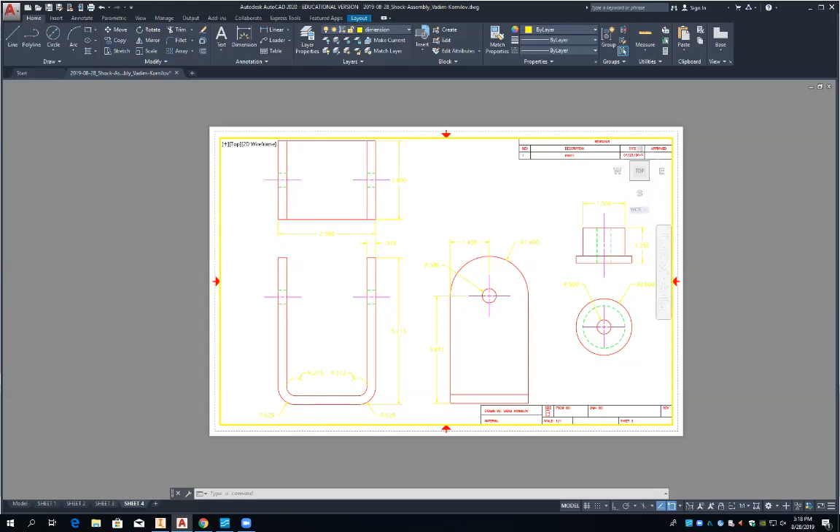Okay, here. Okay, so we're going to do a new, and this thing was right? Yeah. Okay. Okay, so does everyone want to start from scratch on this so we kind of work together on it? Yeah. Okay, so as we do this, I want to do an auxiliary drawing. We did a little section drawing with the revolve command. Did we just try to revolve, or did we do an actual drawing with it? I think we just experimented. Okay, I'd like to do an actual drawing with the revolve command after we do this today, so that you get going. Okay, now, the one thing I want everyone to remember is this.

If you want to, and I'm going to try something new starting next week, okay? And I think this will help everyone greatly. I do a drawing. I found out that in PowerPoint, you can actually record everything you do. And then I'll post that PowerPoint on Canvas for you. Okay, so that if you go home and need any extra help, you can just look at that, and I'll start and stop. You know, I don't want you to have to look at something for 2 hours when it only takes about 20 minutes to draw the drawing. Does that make sense? And so, those of you who are in the last class, doing the assembly that we did even here, we can record that whole thing. Like Windows 10 also has a screen recorder program.

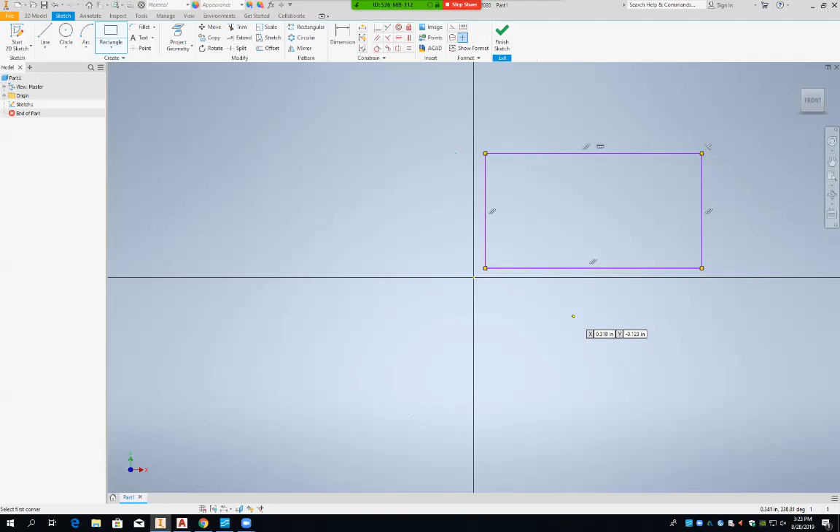In fact, I'm going to do this one slightly different. Hope it works, I don't know if it'll work. I've never done it this way, so we're going to try it a little different. How's that? Good enough? You're the boss. Okay, let's draw our rectangle this way around our origin. How's that? Okay. So we're just going to try a different way.

I just want you to see how things react, because as you do different types of drawing, you might see one that this might apply to a little bit better. And I'm doing this to hopefully introduce a new command later on as we start doing those two little brackets there. Okay, now question for you.

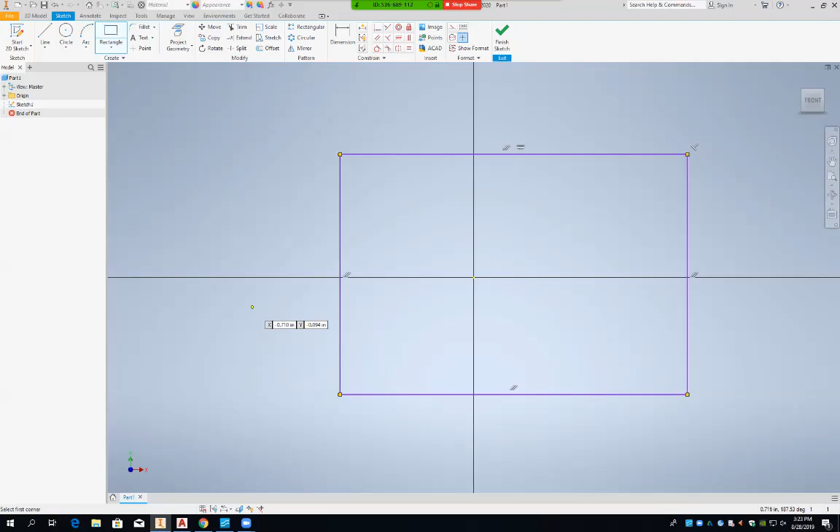If you go ahead now and do this, a lot of times what I'll do first of all is stick a dimension right there and just accept it. Just whatever it is? Just whatever it is. The reason why is a lot of times if you don't do that and go from the center to the end, it might shove that whole rectangle out of all the coordinates into one coordinate. Does that make sense? So basically later you'll revisit that. We'll revisit this dimension in just a few minutes. Does that make sense why I'm doing that?

A lot of times when you start modeling something, you do a nice little sketch of the part, you add one dimension, and it inverts the whole drawing. So just have a placeholder and then add some others and go back and edit it. That's all you have to do. Okay, so now this is 5 inches, right?

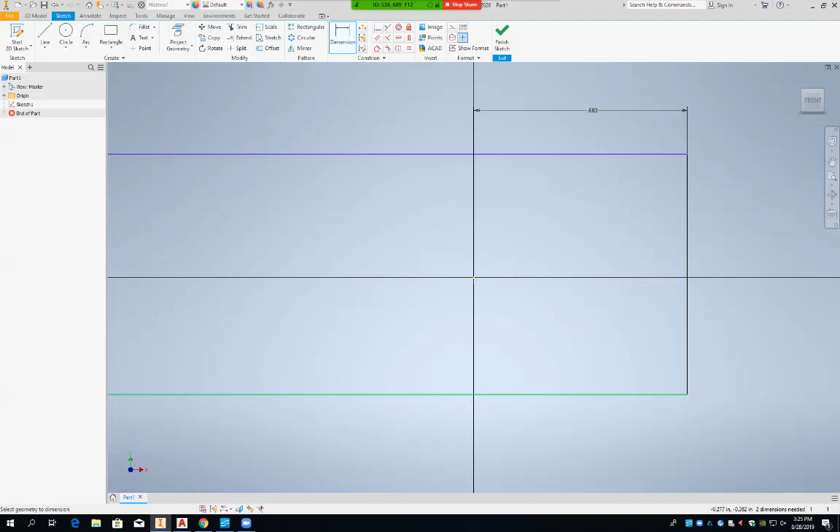So now what I'm going to do is go from the center here out to here and just make this 5 divided by 2. Yeah, it's a tough measurement to get, isn't it? Okay, now this one is constrained, so I can actually delete that one right there and then add another dimension here of 5. Does that make sense? So I added a placeholder in there to keep it from moving all over the place, and then added that in 5.

Now, this probably would have worked just fine, but I'm just trying to show you some things that might help you in the future. It's refusing. Oh, no, we deleted it. Okay, mine looks different. Okay, so now, this is that. Good, now let's go ahead and add a dimension here and make that 5. Okay, so there, now.

Now, could we escape for me? Now, let's delete this, oh, I'm sorry. This is 5 divided by 2. Oh, okay, I thought that. That's okay. 5 inches divided by 2. There you go. And then now, 5 divided by 2. Okay, so we better undo this here. If you can get your computer here, you want to put that there. Okay? Does that make sense? That's why it looks different.

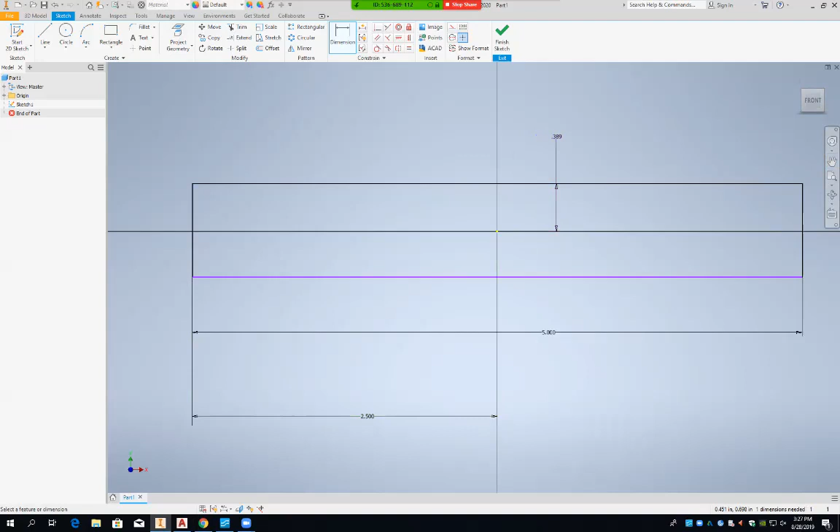And then we're going to add a dimension from here to here to keep it, and then from here to here, it's going to be the height divided by 2. And then we're going to delete that. Okay. Now the height of this is 3, right? So all we're going to do now is add a dimension from our center point here up to the height here. Again, it's just a placeholder. And then from here down to here, it's going to be 3 divided by 2.

Now, if you just want to type in 1.5, you can, 2.5. I just want you to get used to the calculator. That's all I want to do. Okay? Now, I'm just going to delete this here now, and then let's dimension this whole side here as 3. See, I'm completely symmetrical around my origin.

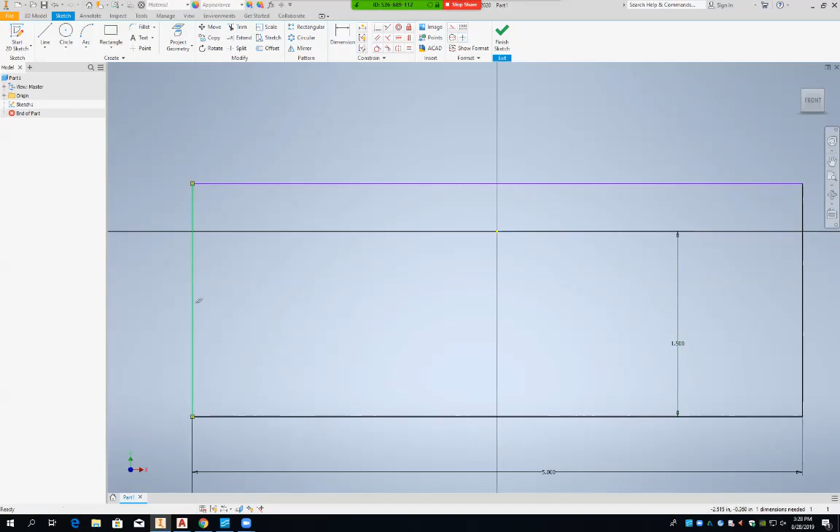Oh, I see. You get what I'm trying to do here now? Yes. Okay. So, I want to show you another way of using the axes that are automatically built in with our origin, with those planes that we started with. Okay. So let's go ahead and finish our sketch. Does everyone have this okay?

Anyone not have it? The delete. So okay, I get confused when you said, sorry. I'll wait. So, you can delete this one here. Delete him, and add a dimension now, and you can go from here to there. Because it's only the half. And then we'll do the same thing going up and down, side. Okay, that makes sense? Can we do it also up and down? So, we have options here.

Well, it's like we're using two pieces of information. We're saying the whole thing is 3. So why did you do it like that, with the origin together? It's half of it. So by calculation, this is a half as well. But it's just that we approach it by saying, this is 3, this is half of that. There's numerous ways to do things, and this is just one way to do it, one way to think about things.

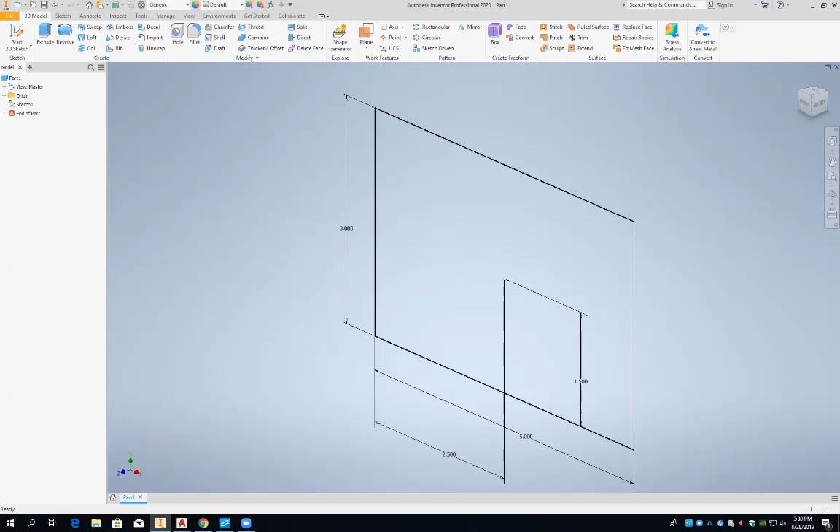Why they even put it there? But yeah, the asanas that you do is one of the aspects of yoga. Okay, so now, other ones. You've heard of Kundalini, right? You never heard of Kundalini? Okay, that's how you reach enlightenment. But you need a teacher. You raise the energies, the chakras, to the top chakra, and once you reach the top chakra, that's it. You get nirvana. And I say that once you reach nirvana, you die. Because you connect to the source, you experience such happiness and joy that you don't need food, you don't need anything. You're done.

Right? Okay, so let's finish our sketch. Now, you realize that when you do this, remember you still had blue lines up here until you had it constrained to the origin. So it could still be moved around, right? The box would just be moved around, but now we've locked it down to the origin. And everything turned black and constrained on you.

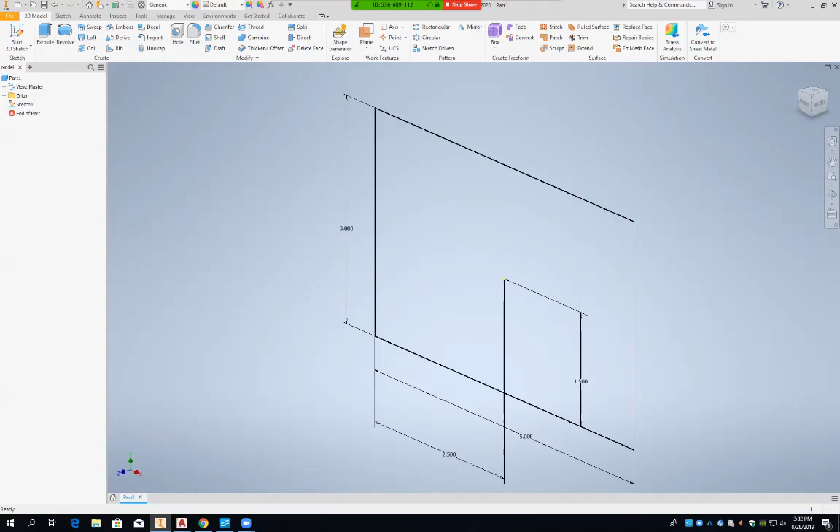Okay, so let's go to our extrude. And so what we're going to do is the third one, symmetry. Okay? And then what we're going to do now is, what's the depth of this? 2.12, right?

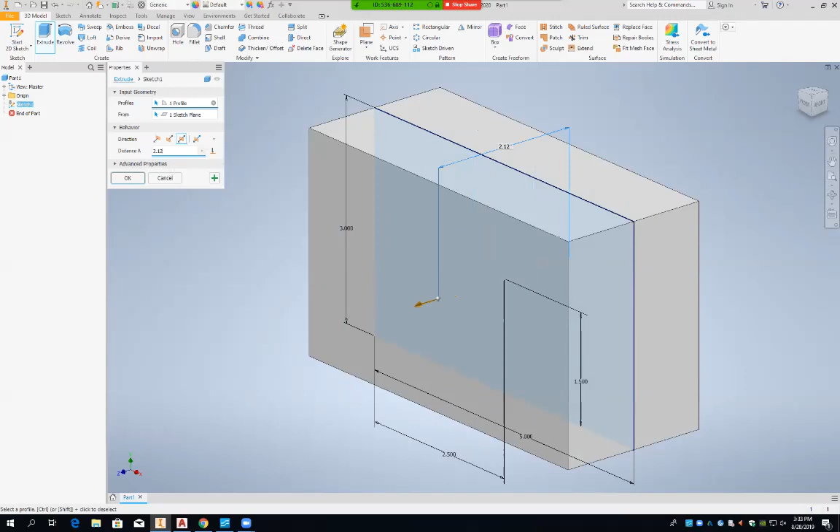Okay, you see how it's kind of built symmetrical about me right there? And then hit OK. So you need to divide it by 2? No, because hitting symmetric, it divides it by 2 going both ways. It does automatically if you hit symmetrical. Now, if you hit the fourth one, it's asymmetrical. And so you can have maybe like 1/4 and 3/4 out here. Okay, does that make sense?

Okay. And then hit OK. So we have our chunk of metal right there. Okay? It's a little different way. I just want to give you this, because every part might be just a little bit different as you start actually physically designing it. Now, like the location of the origin in the part that we designed, that probably affects when you do an assembly? You bet it does. When you insert the part, it will place itself in such a way that's good. That's what the origin affects. There's definite advantages of it that you can tweak and use down the road.

Now, some simple assemblies, probably not too bad, but when you get into some complex assembly, so like, one of the opportunities I had was, me and a couple other guys, we modeled up an F-16 on the computer. Wow. And so here you have to think about where all these points come into play and where's the common reference point and everything else. And so you get into some big projects like that, then you really start thinking about how to do it. But what I want to show you right now is this.

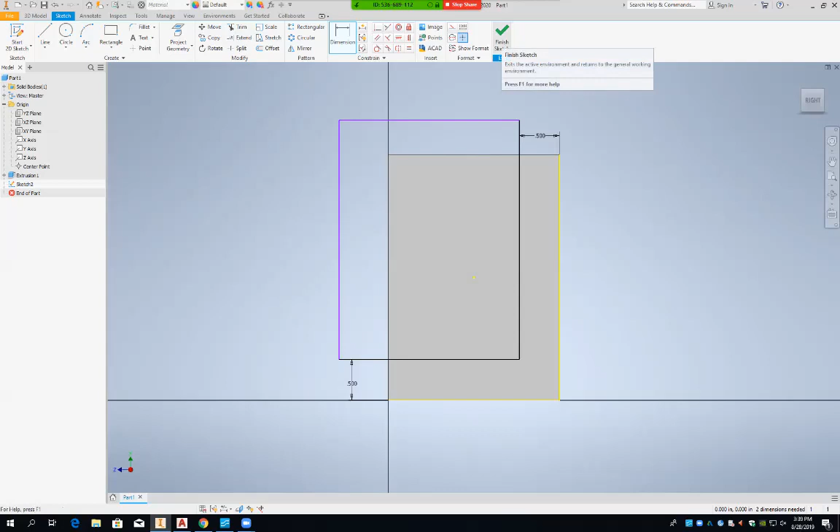Okay. So from here now, let's finish your sketch right here. Let's go to extrude, and we're going to cut now right here. So hit cut, and then for distance, you want to hit all the way. Yeah.

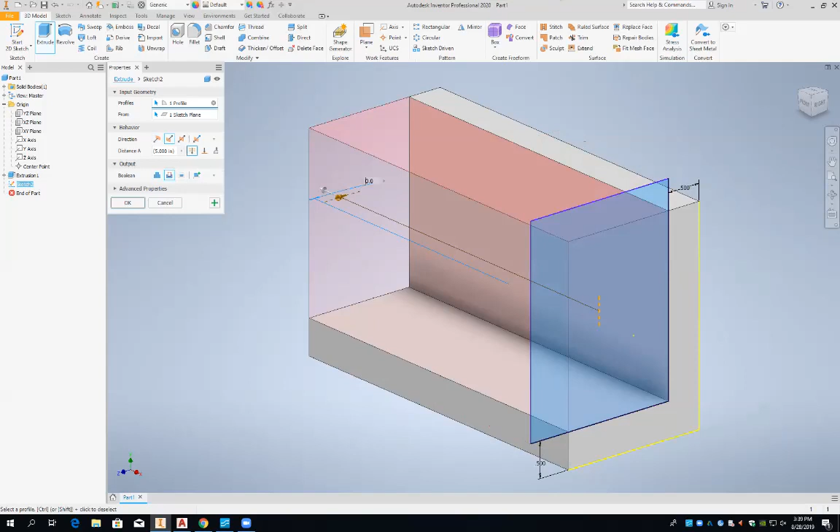Yeah. That one. Through all. That's what I wanted. Yeah. Through all right there. Okay. So again, by working with the center, it acts a little bit different where it goes one way versus the other way through all. Okay?

Okay, now, these chamfers, let's put these two chamfers on here, and then these two chamfers here. What I want to do is to do one and then mirror it to the other side, so you only have to draw one and then mirror it. Okay? That makes sense? And the only reason we got it in the center is I wanted to use the default plane to mirror it about that plane. That's why we did it this way.

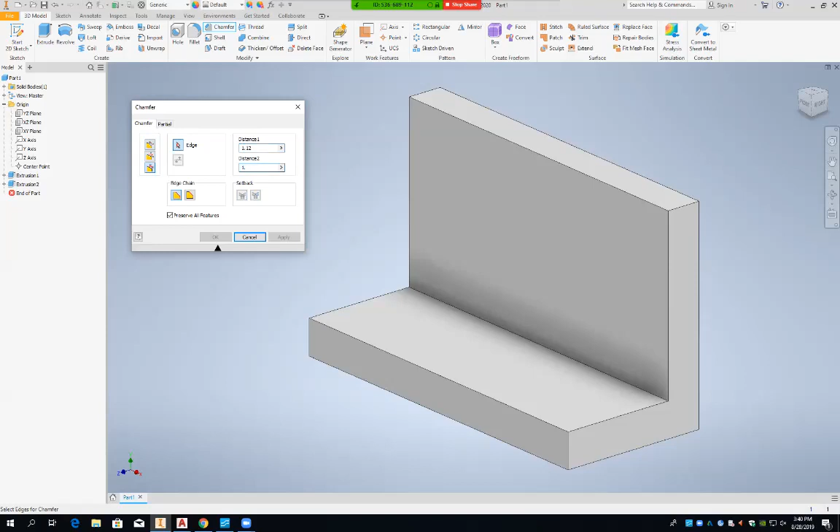Okay, so now, what is the size of my chamfer on this? 1.12, right? So we know it's a 45, but we're going to go with two distances, right? And then since they're the same, just type in 1.12. And then it's asking me for an edge. So it's this edge right there, and that edge right there, and you've got your chamfer up there.

As long as they're equal, you just have to do the distance. You don't have to worry about hitting a face. It's asking for an edge to do that chamfer there. And it did both? Yeah, because they're both the same.

Okay, but there's something else that I missed. I only see one. Right, so now hit okay. Oh, but your other one. So go back to chamfer. It's that line right there. Oh, I thought they went multiple. Got it. Okay, thank you. I thought you did a little tip there that did both at the same time.

Okay, now the other one is two distances, right? What's my second distance on that one? I think we talked about this a little bit on Monday. So let's go back to chamfer. Now, two different distances. So I'm going to go with two distances right here. Distance 1. Now this depends on which face you pick. The face you pick depends upon the first one you enter in for the distance. So we do it opposite of what we did on Monday.

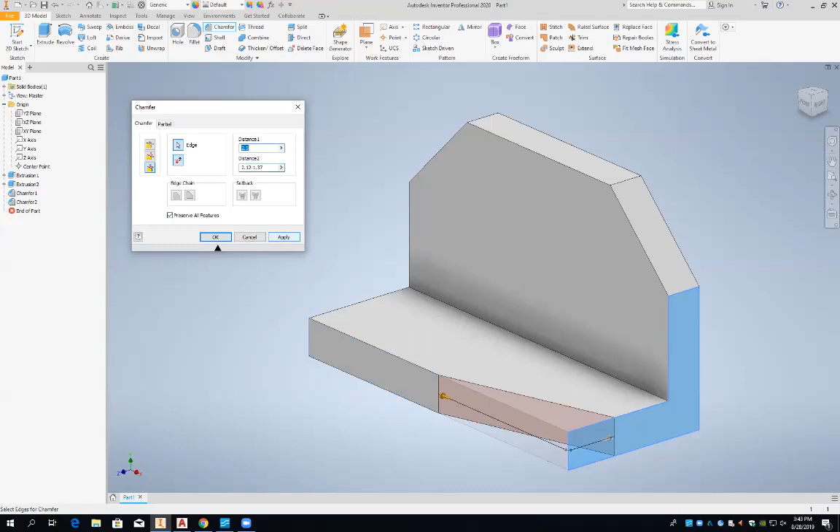Yeah, I had a problem with that one too. I got to click on the switch. We can switch it that way. What did you do? Hit the switch button right here. My switch is gray. You first select the edge, and then the switch turns on. Yeah. Okay?

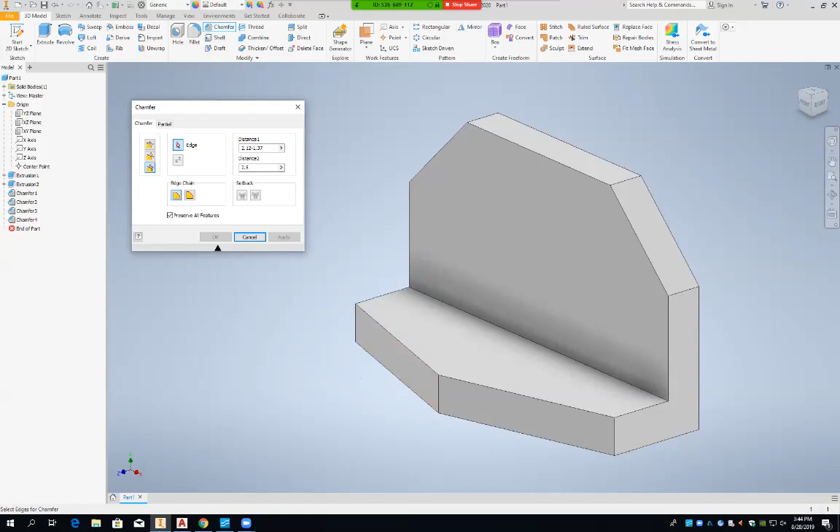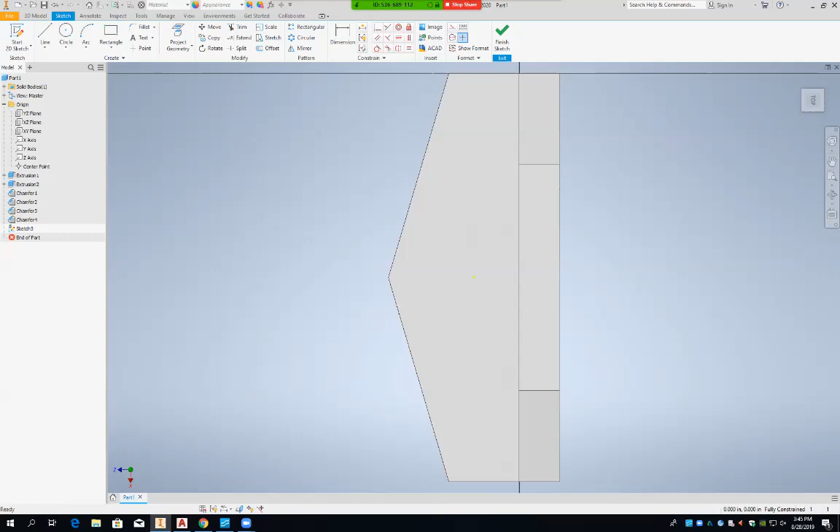Okay, so let's do a chamfer on the other side too. Okay, now we got to add that little web in. First of all, that is flush with this first edge right here. So if I start a 2D sketch on this surface here, I want to go up with it, right to there. And since I don't like that orientation, I'm going to flip it around. That makes sense how I just manipulate it around so it's what I wanted to see.

Now I want to have access to this line and this line right here in my sketch, because let's say I drew a line right here, and then I dimension that line from here to here, and that should be 0.5, right? So I have to trim this off right at that given point, and this one needs to be trimmed off at this point right here, correct? Yeah, I just dimension the point to the edge, because it comes right to the edge. It's an alternative.

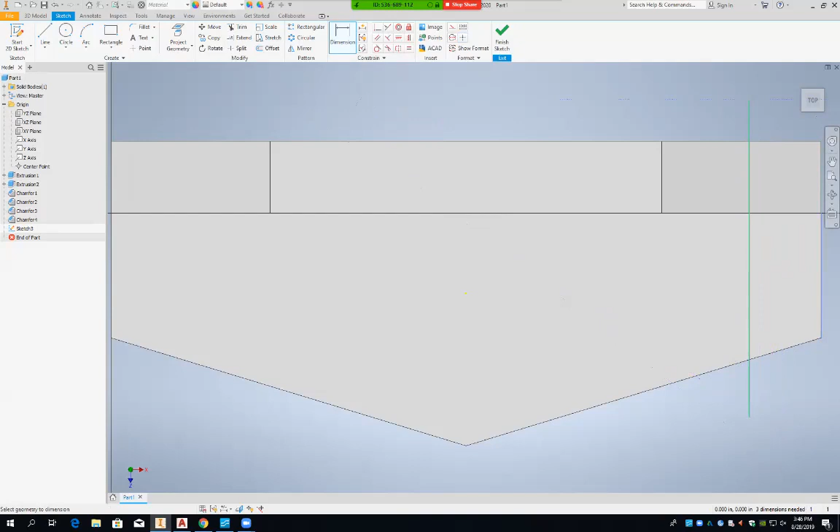Okay. So right now, if I go to trim and hit that, it's gonna trim the whole line, isn't it? So let's hit undo. You see where it says project geometry? Any line you have on any view, no matter how deeply embedded, we can project geometry back onto our current sketch plane to dimension from it. Does that make sense?

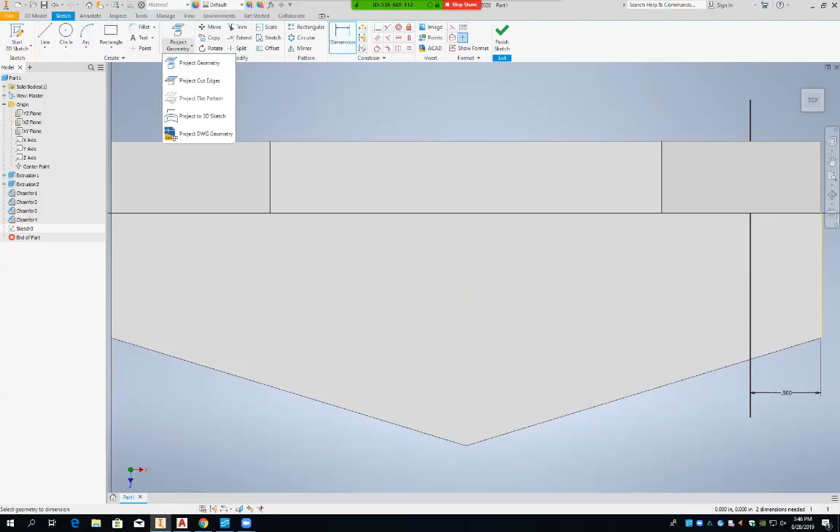So let's go ahead and hit project geometry, and project geometry again. I want to project that line right there, and let's project this line right here. Now, you see my sketch plane? I have those lines on there now, right?

So now if I go to trim, there's my line, the exact length of it right there. Are you with me what I just did? I just projected those two other lines onto my plane so I could use them to trim and get the length of that line.

Now what we could actually do is draw us a rectangle. I could go, because I have that exact point right there, don't I? And I could go to here, and then add a dimension from that point to here. What should this measurement be? Zero, because I want to bring it right up to that edge, don't I? And then I can add this, which is 0.5. There's my rectangle to extrude up.

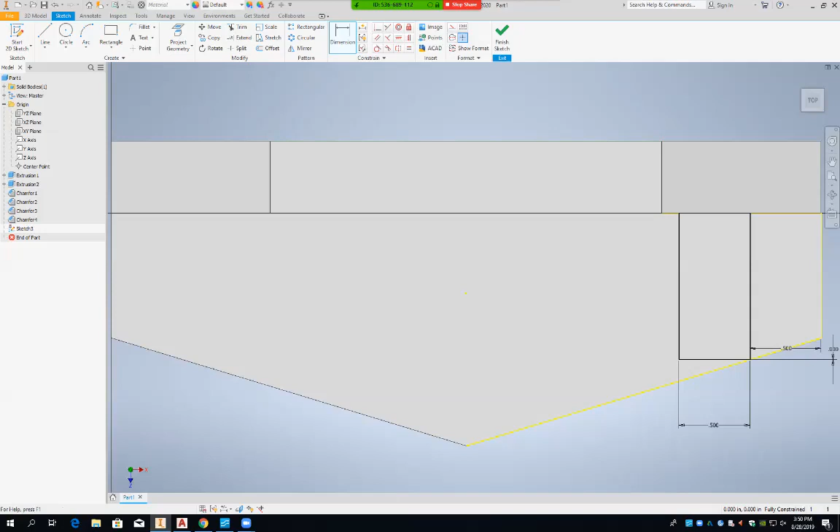We want to extrude this up here. And how far do I want to extrude it up here now? Now be careful, tell me what it is. 3 what? Minus 1.12 minus 0.5. Does that make sense? Just type them all in.

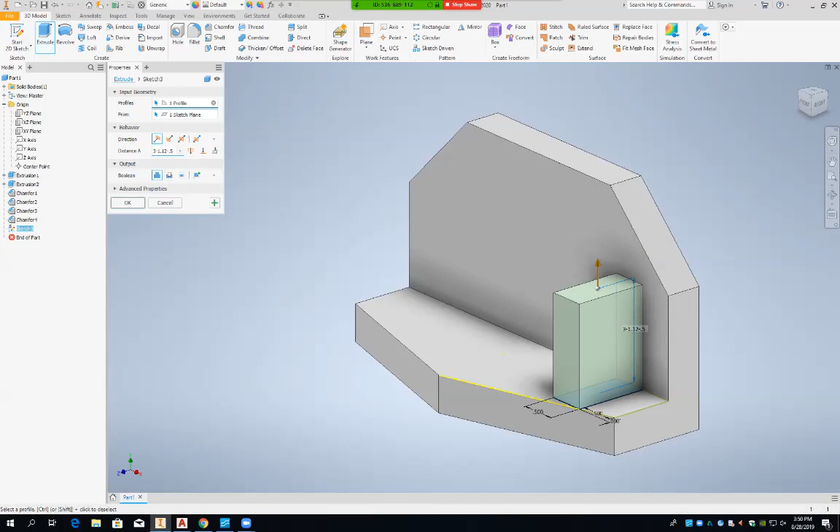Now I can put a chamfer on this, couldn't I? Because I can figure this length and this length here, right? So all we'd have to do now is come in here and go to Tools and measure. I just need to measure that line right there. What's the length of that line? 1.020, right?

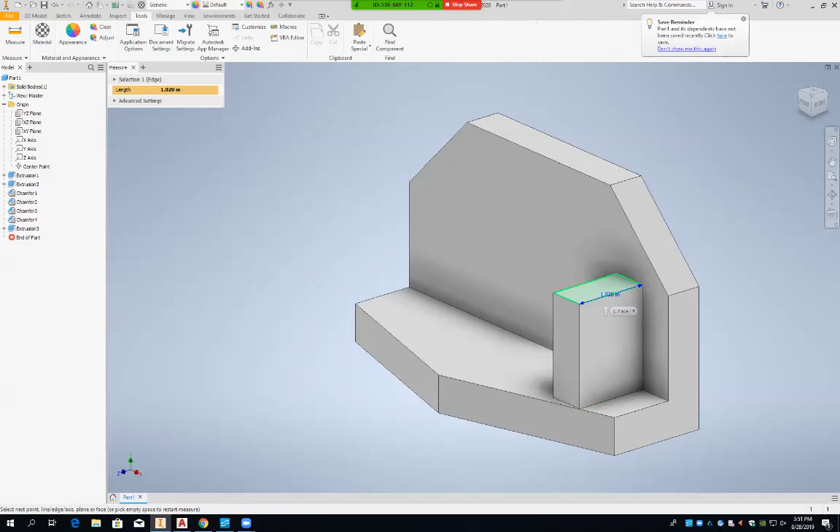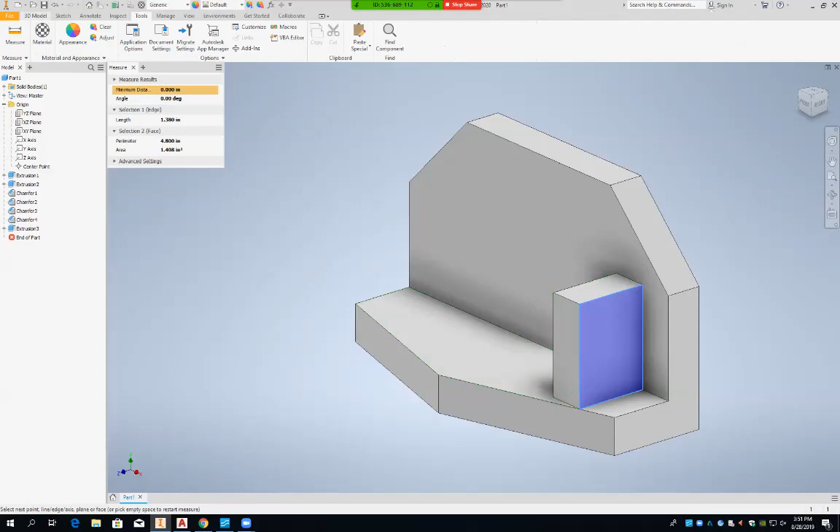So what's the length of this line here now? 1.380, right? There's my chamfer distances right there to build a chamfer on that, isn't it? Did you hit measure? What kind of... yep, so right there. Yeah, you got it.

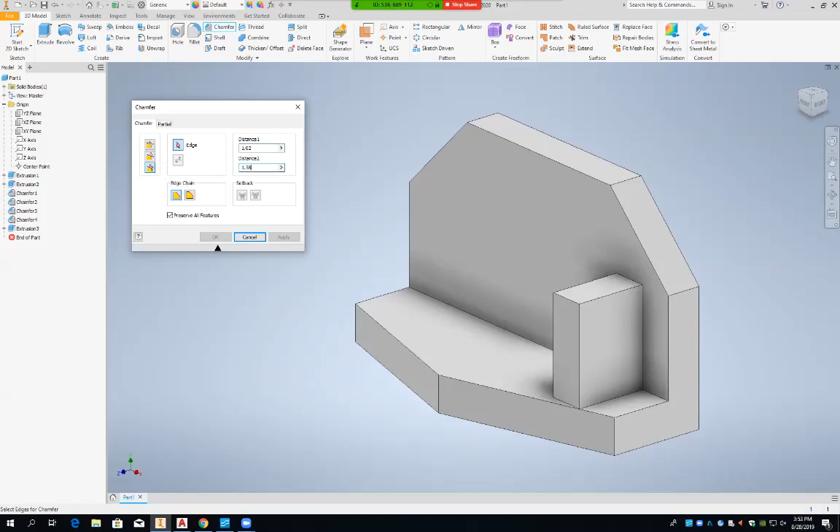Okay, so now what we can do is go back to 3D model right here. We have to go back into here in order to get access to our chamfer command. And then we have two distances here now, right? Now, I probably could have drawn a line here and picked that angle and dealt with an angle if I wanted, angle and the distance. I could have done that originally, couldn't I, if I wanted. If I would have just drawn a line from this point here over, I could have done it if I wanted to.

So our two distances now are going to be — I try to always get in the habit of putting the shortest distance up front — to 1.38.

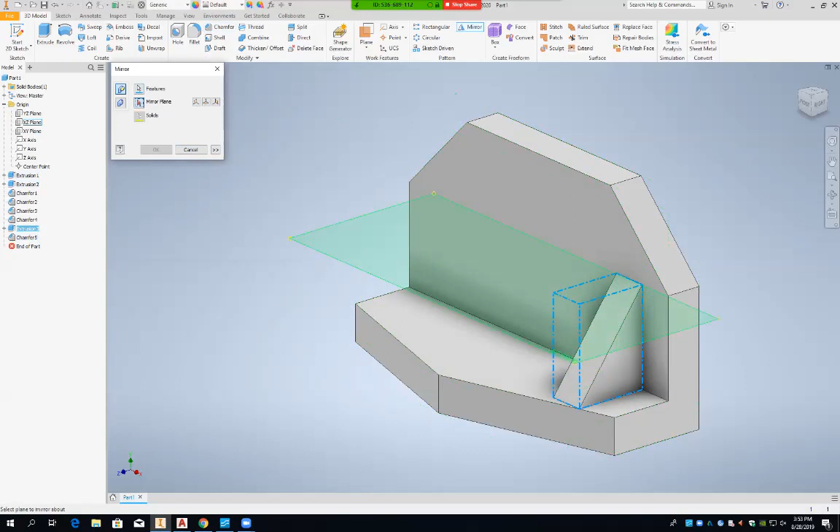And then the other distance is 1.02, right? And then all we have to do is click there. And guess what? There you go. Does that make sense?

No. Did that work for you? No, you picked the wrong line. Pick that one right there. Where you at? Yeah, I got my 1.38. And there you go. So you picked the long edge, so you were doing the chamfer this way.

Okay? Yeah, that makes sense? Okay, now look, let's go back to the edge. There you go, you got it. That makes sense? It's the edge. And then put that.

Okay, now, okay, so I'm going to click that. Mirror plane.

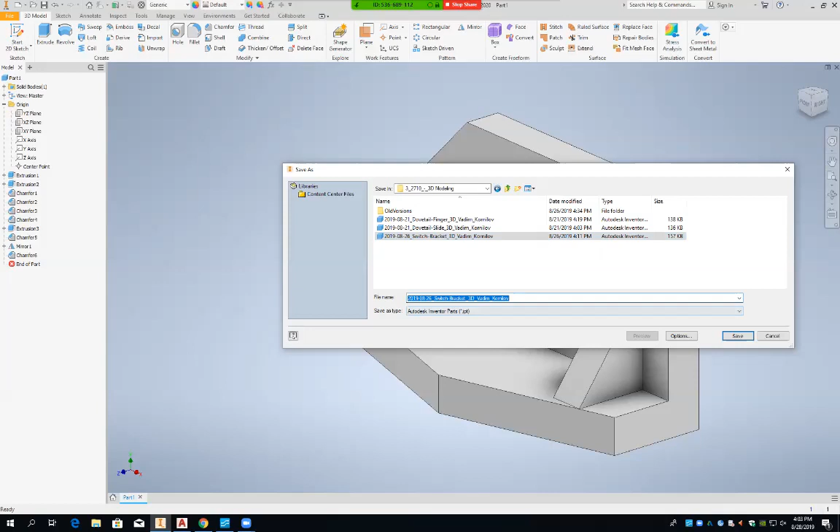Okay, so what I want to do now is - what is this called? Bookend? Okay, let's see here. That's too easy. Okay, I want to, we're going to do what's called a stuffing box. I think you guys may have already drawn a stuffing box before, maybe in AutoCAD.

Okay, so we're going to do now a revolve. Right there.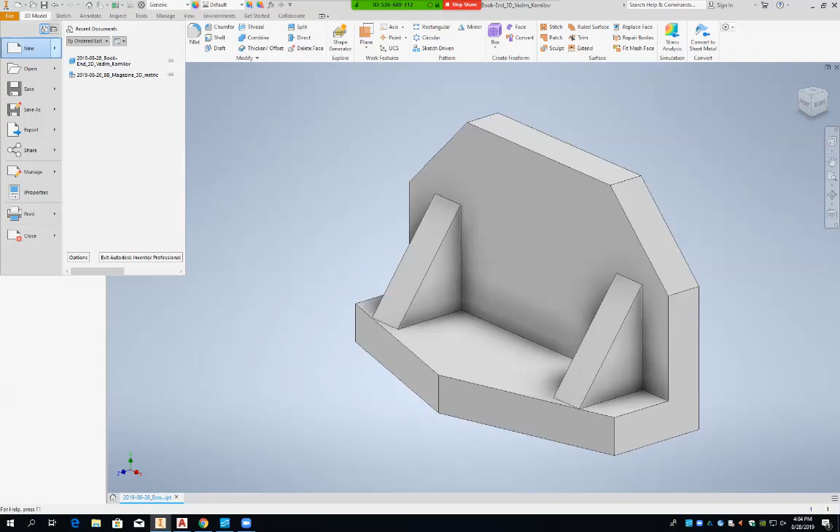Okay, so we're going to do that stuffing box. And the thing I like about this is we're going to edit the holes on that - we're going to make them counterbore holes. And we have a drill. Yeah, this is good, this teaches a lot of things. And Mike, of course, you remember that it's metric, right? Okay, it's metric, thank you.

So, file, new, metric, standard IPT, right there. Okay. Do now is to start a 2D sketch right there. I'm going to do this on the right side view, right there. Okay?

And we're going to go ahead and just do it with the line command here. We're going to come up a certain distance. Now, question for everybody - right now, if I look at that, what's the diameter of that, the outer overall diameter, the most outer one? 114 - is that 114? Okay.

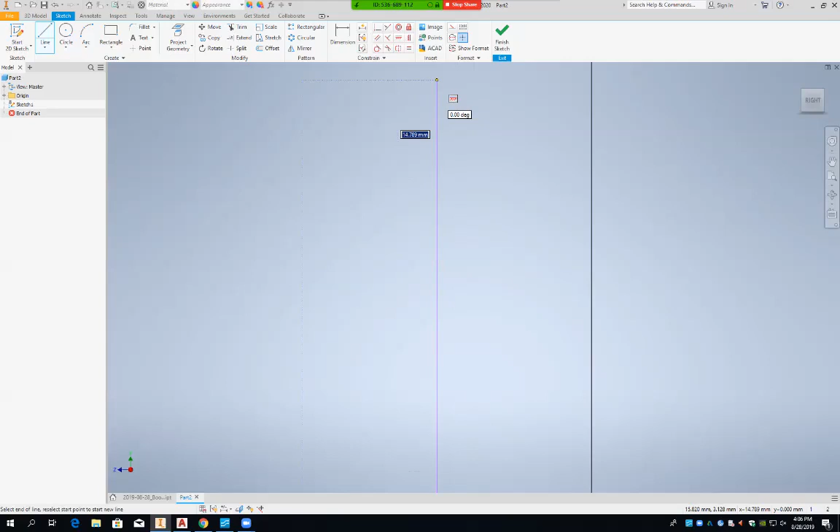And I think it'll make it so when you start to dimension your sketch, it might make it a lot easier for you. So I just want to go up so I see this maybe up about 50, so maybe somewhere in there. Does that make sense? And then I'm going to come over here a little ways.

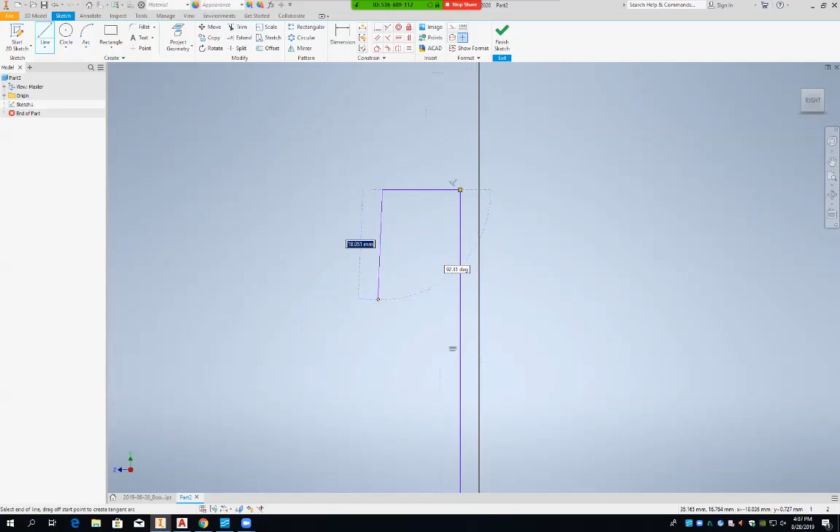I'm going to come down here a little ways, come over, come down, come over, come back up, and come over. I'm going to come down to see where I'm lined up to that bottom of that line, and come to the green dot and enter. Okay? Do you see how I did that? Yeah.

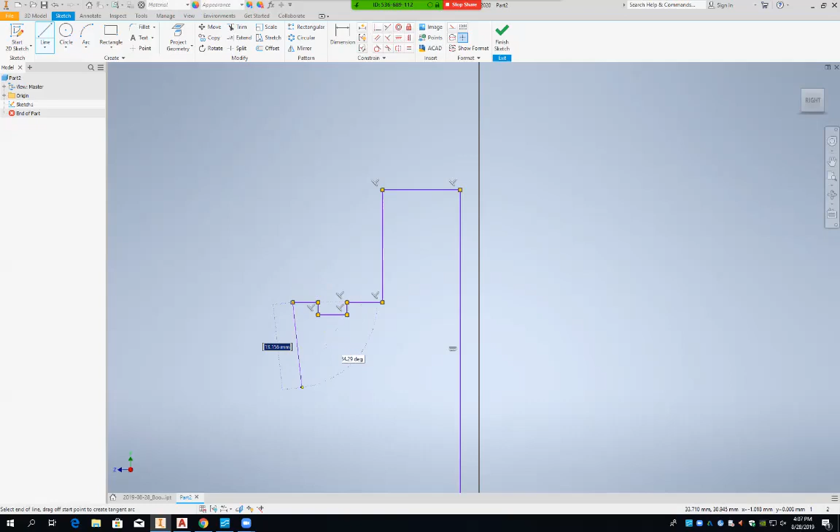So, right there, and over about there, just anywhere there - it's like an AutoDesk thing, that's okay. Now come down, roll out, parallel to everything or something like that. There you go. Is it not doing it? Go up, look, you try now.

Yeah, right there, down one little, there you go. Put that, it's over more there - sensitive than AutoCAD. See how you can tell what's lined up, these little dotted lines? And so now we know we don't have one line that isn't parallel, 90 degrees, right? Because that line right there - we can make that parallel by just doing this here, which is the parallel command, see? Right?

What I was thinking kind of, in AutoCAD - yeah, so it was if we want this, well, the F8 is ortho. Cool, okay?

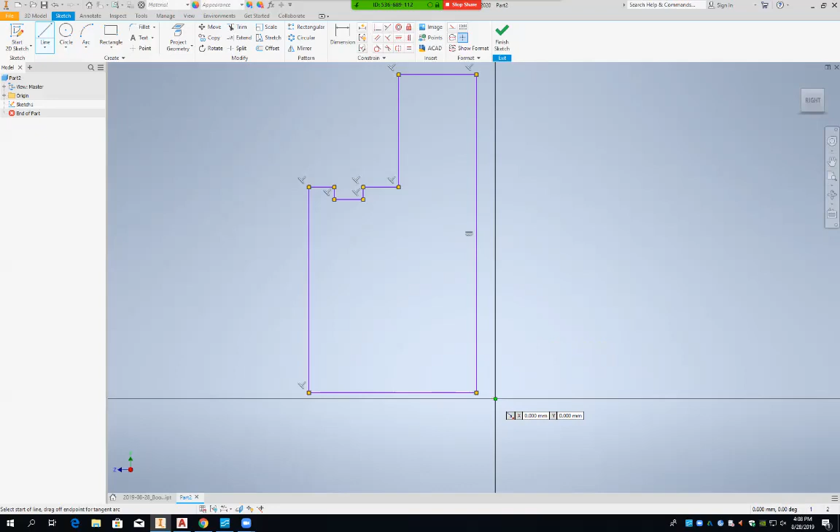Okay. So the first thing I want to do is what? Constrain to the origin. Constrain to the origin. Yay. Okay? So just pick this line and the origin right there and make that 0. And then click this line here over to the origin and make that 0. That makes sense? Again, I think that will solve most of your problems as you go through and do this.

Okay, so you should have this down. What we can do is I'm going to do that instead.

It's not about the age. Well, sometimes I think that. Okay, that makes sense? It just might be. I mean, I've been doing computers for 30 years.

We're just doing the outside shape of this stuffing box. We aren't doing the inner hole yet. We're gonna create that with the drill as we go into this, how you build the part, right? Yeah. Okay, so let's go ahead and add some dimensions on it. How wide is this right here? I think it's 16, isn't it? So let's add some dimensions from here up, make that 16.

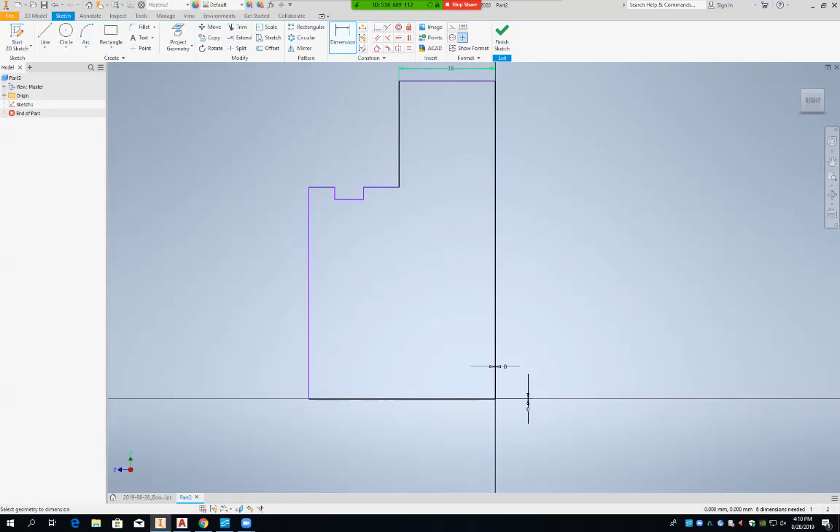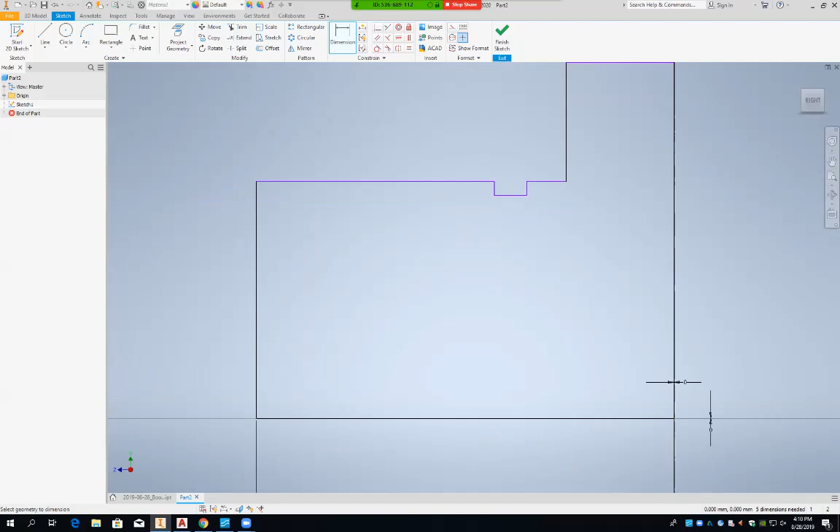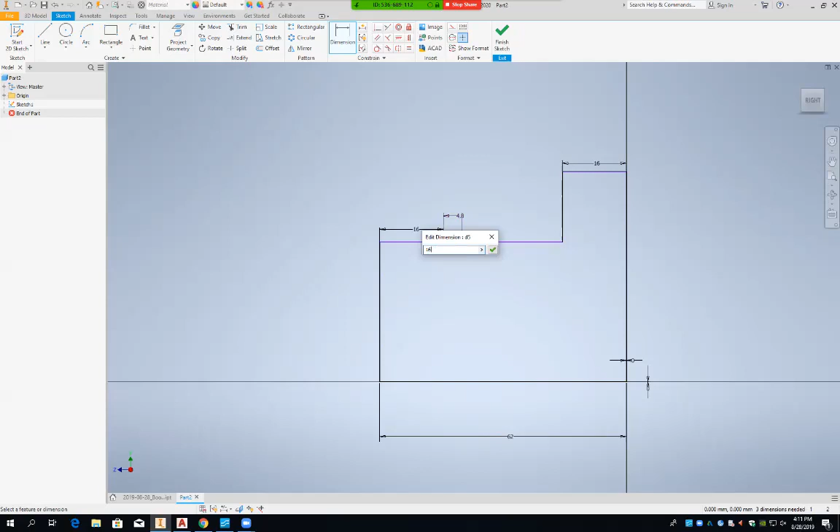Okay? Now, what is my overall depth of it? So I'm going to have this one here at 62. Can you see why I'm trying to pick some points that won't throw my sketch all out of whack? I can see why. There's mine. Yeah. Okay. Then, 16. And then this distance here is 16 also, right? And this is what's left over right there, isn't it?

Okay? So that's what we want so far, right? Three 16 measurements and 62, and we haven't given the height yet, have we? So 114 divided by 2, right here. See, now that's black right there, so I got this. I just have to get these heights here and the depth right here, right? And then my shape will be totally constrained, won't it? Okay, very good. Yeah, you catching the idea there? First thing we want to mention is lock it in.

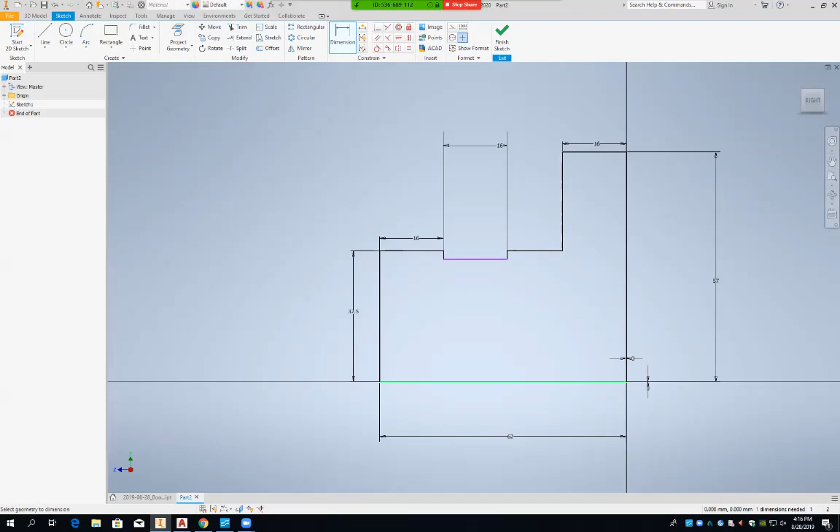54 divided by 2, that is right. So from this bottom line up to here is 54 divided by 2. Okay? There we go. There's our base part right there. Everybody okay with that? I had to do it a second time, but I got it. Good. Okay, so let's hit finish sketch right here now.

Let's revolve this around our axis right there and hit OK. So there's our blank shell to start working with to add all of our other features up there. Okay? So, first of all, do we have any fillets? We don't, do we? Okay. Now,

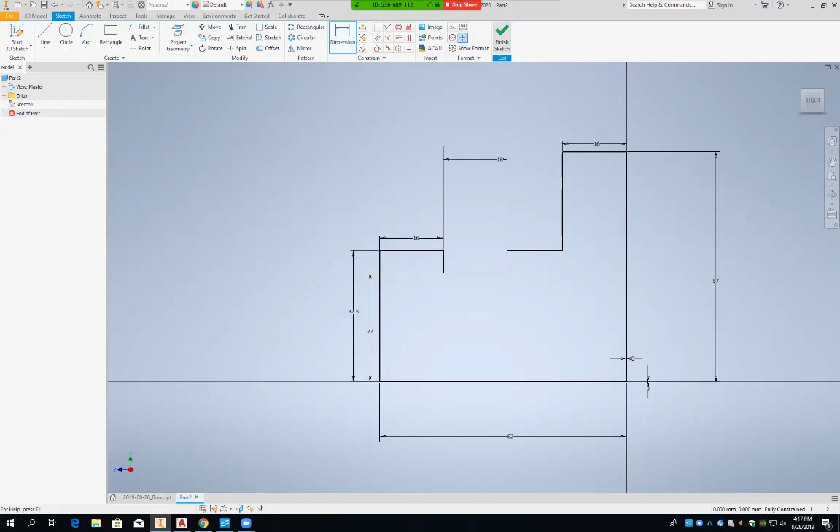on this space right here, we're going to drill a hole all the way through, and then we're going to drill another hole and go into a certain depth. Does that make sense to everybody? So let's start another sketch right here on this space right here, making sure front view shows up. It's going to read right up there.

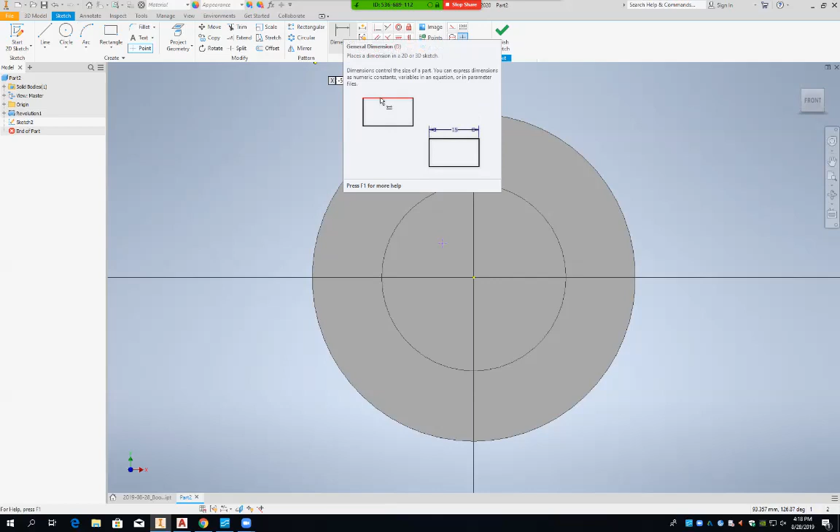Okay? So let's put a point. Let's use points instead of a circle, okay? So we can take our drill bit anytime we want really easy. So click on point and pick a point somewhere out there. And then we're going to move that point into our origin right there with 2 0 measurements, right? So dimension now from there to there and make that 0. Okay, so he's locked in there now.

Finish your sketch. And go to the hole command right here. Now, first of all, I want to have this go all the way through, okay? And what diameter of hole do we have there? 30. So this number right here, we need to make 30. Okay? And make sure do all the ticks and hit OK. Okay, see how it goes all the way through? Okay.

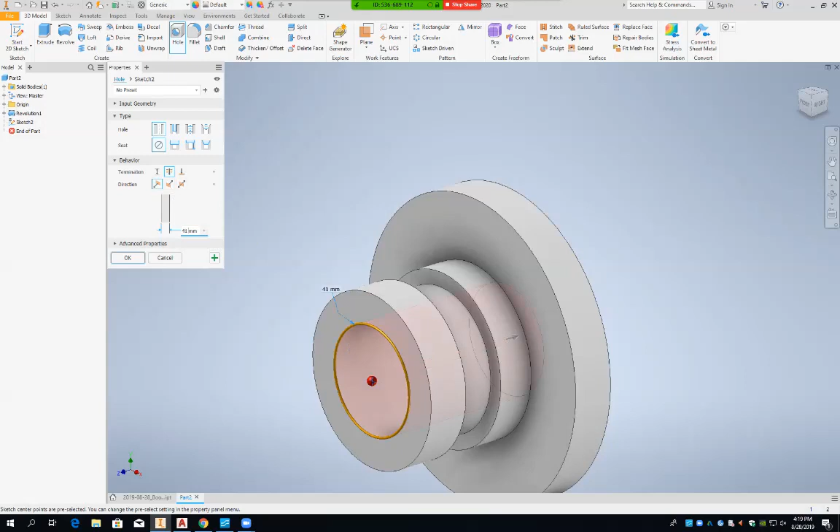Now our second hole that goes in there has an angle of, is that 45 degrees at the end? And how far does it go in? 35. Now, do you see where that 35 is? It doesn't go to the... If you were to put a plug in there, that diameter, it would go in that distance. That's how you determine how deep it is.

So this is the length, how far it goes in right there, isn't it? And that's how you figure, whenever you have a depth sign, that's how you figure the depth. You don't figure to the tip of the drill bit. You figure if you were to put a stud in there or something, how far would that go in? Does that make sense to everybody?

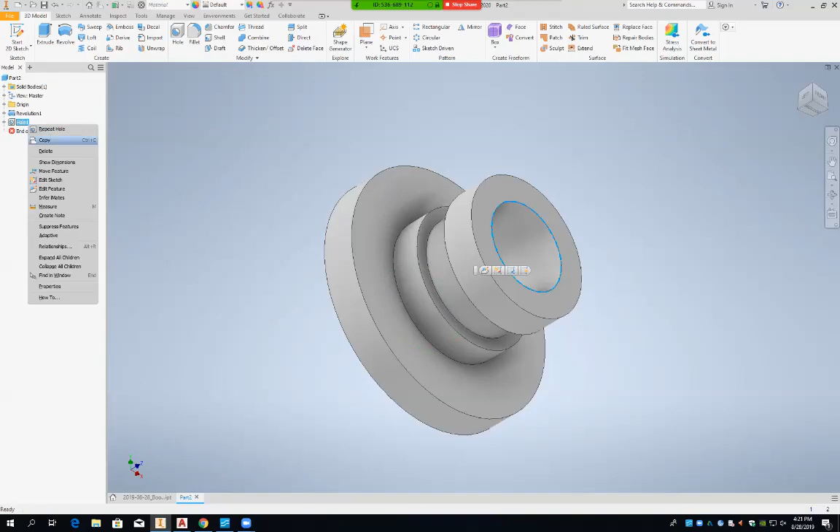Mike, what diameter did you use? Because I'm reading 41. This one here? Yes. Now the 41 for our second one, we're going to do. Okay. That make sense? Right. So you picked. See, 30 is the back one, right? Now we're going to do the bigger one to go in. Okay. Okay? Are we okay on that? Yes. Okay. So you're understanding that.

So you can see how big a bunch you can make now, can't you? Yeah, I blinked on this, you're on the revolve. Oh, okay, yeah. So, here we go. Pick the bottom line. Yeah, you got it. Right, so we have to start from here, so hit okay. And now we start another sketch on the face of that. Oh, yeah. There you go. There you go. Click there, you gotta hit it twice. And then we added the points right here. Now we're gonna do it there. Take the plane, the program automatically knows.

Well, yeah, when we were talking about last time, about just all of that, you know, I started, that was all. I know. So, I mean, here I was, designer, but now I kind of... Now you have some fun tools to design with. Oh, now I kind of adjust. Okay. Because I can remember when if you change the dimensions, you have to go back and change. I know, it was a pain too, wasn't it? And then if you forgot one, you pulled out all your archives and everything.

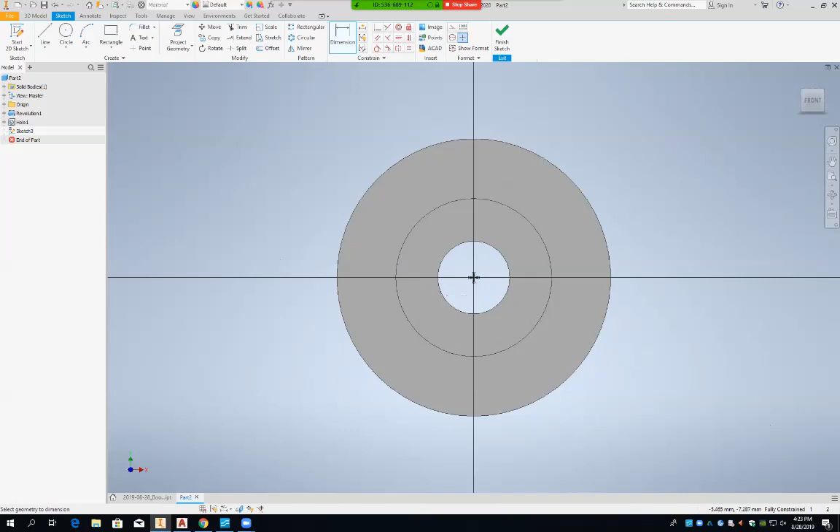Yeah. Okay, so let's come in here now and start another sketch now on this face here. Okay, and let's go ahead and put another point in there. And again, constrain him up, he's 0. Okay, finish your sketch now, so he's kind of out in space right there because there's no material there, is there? But we're going to counterbore him in. So let's add us a hole right here.

Now, we want a hole, but I want it a distance now. I don't want it through all. Right now it's through all right here. See that? So let's get a distance right there. Okay, now you see I have an angle here for my tip, 118 degree, don't I? My length, what should the length here be then? Is it 55? 35? 35. Now, question for you, what is this diameter here?

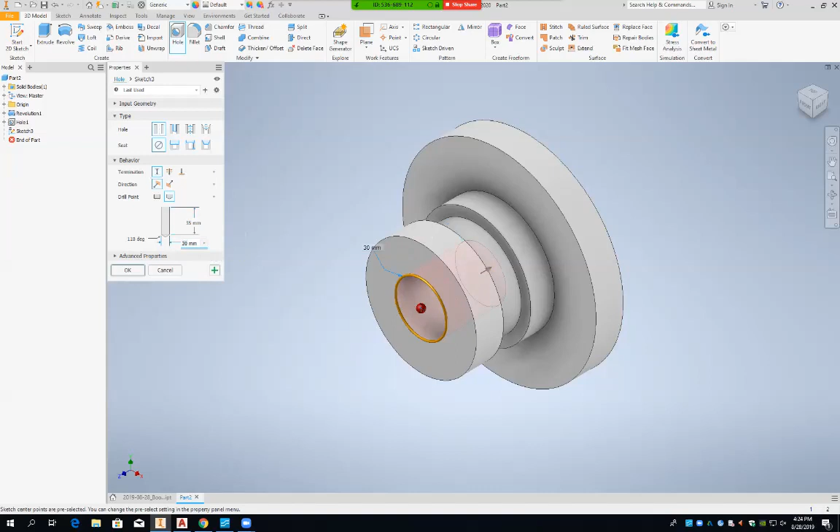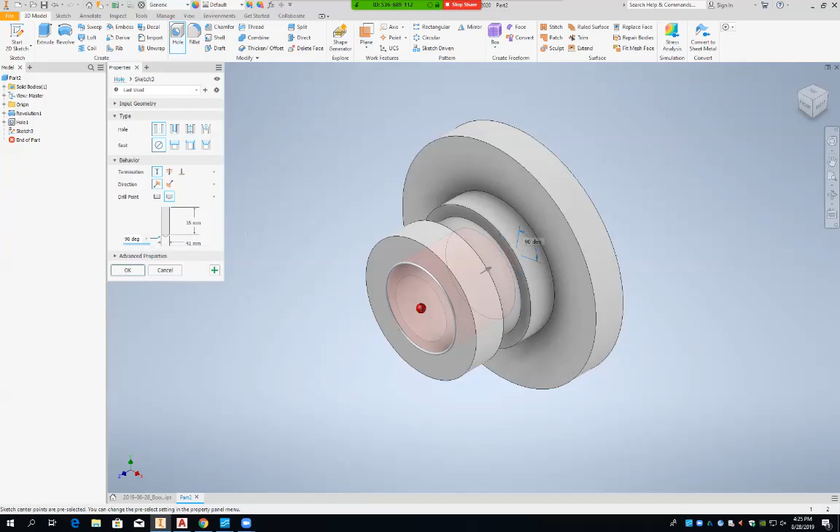Oh, 35 up there. 41. Now, what is my degree here going to be? Yeah. Okay, so 35 to 90? 41. So the degree would be 90, right? Right. Does everyone understand that? 35, that's my depth, right? And then the diameter is 41, and then 90, so hit OK. And guess what? That gives you that slope in there.

Now, let's see if we did it right. Okay? I want everyone to make sure you did it right. Hit front on that and save your file off. Save as part 4. I'm just going to save mine in my desktop and hit save. Okay. Now, I want everyone to go to File, New, Drawing. Okay, so it's going to bring up a drawing sheet for you here. Hit Base right here, isn't it?

Now, I'm gonna make mine 2-to-1, just so you can see it, okay? I'm gonna pull it up here. Okay, now I'm gonna do a section view of this, okay? Oh, we got to put these holes out here, didn't we? Okay, we can go back and put those on. We just want to check this center hole, make sure this center hole material is right, okay? So go to section right here.

With your red dotted line, come down here. Do not pick this point. Just line your cursor up and have it come out. So the first time you pick it, it's going to be about right here. Click there. Come down here and click it about equal distance. Come over here, right click and continue. And there's your section. Look, you got it. Looks just like in the drawing, right? At the 45 angle drill bit right there. Does that make sense? So we did it the correct way. Now let's go back and put our holes on it.

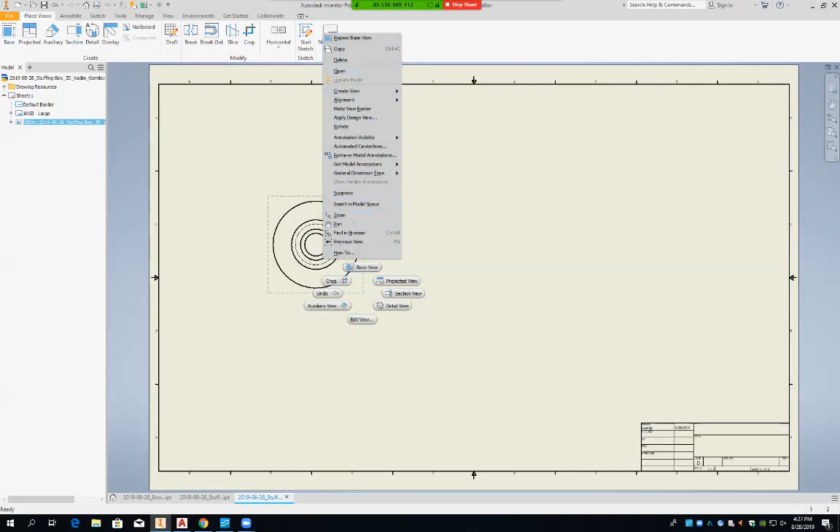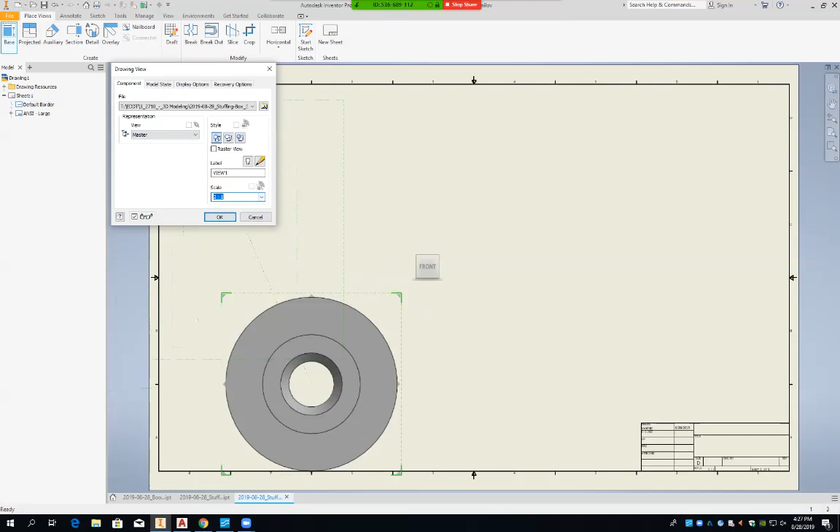Mike, how did you double it up in size? Okay, hit undo here. Okay, go ahead and put base. Base. Okay, scale right there, 2-to-1. And then hit OK. And then pick the red dot and move it up. Okay, that makes sense? And then you did a line. Then we did a section. Hit section right there. Actually, I noticed that when you right click, it has a section view, so you can click it there.

Now, bring your cursor, but don't pick that center point. Now pull it right out. Out further, about right there. Click there. Now come up here now. You accidentally picked that point. So just hit section here. Now, come down to the center here. I'll pick this red line here. Okay, now come down here. Now come up, but don't click it. You clicked it. Okay. You can't click it. So you have to undo and go back. You're just aligning yourself is all you're doing.

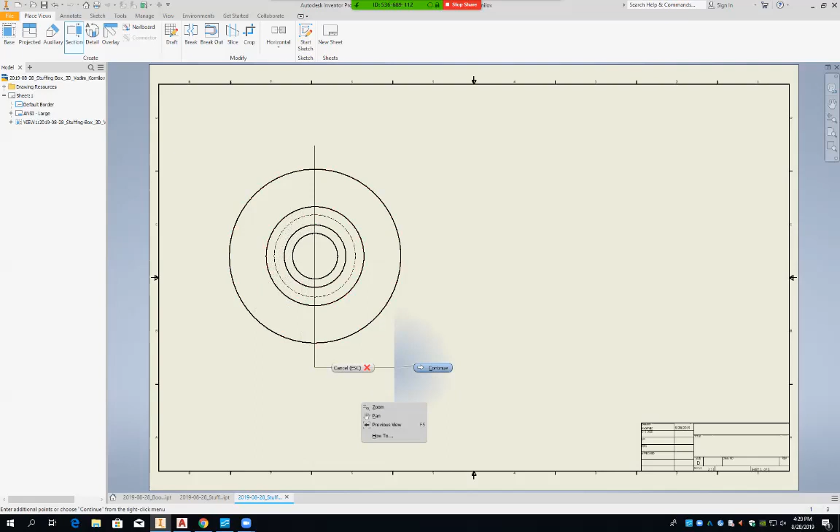So look, let me show you here. Oh, and then you went to the side. Right, so section, click there. Come down here. I'm not clicking it, am I? But I'm coming up and see it lets me register now to that point. And then click there. So that's your first click up there. Then you come down here about equal distance, click here, come over here, right click, continue. So there's that side, there's that side. So you can flip your section. See your cutting plane line, how it rotates? Okay. There you go. All right.

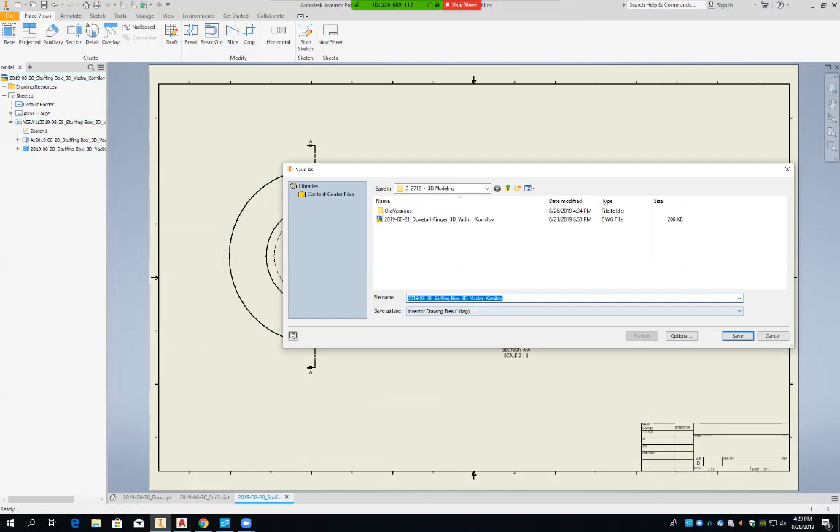Okay? Thank you. Okay, let's put our counterbore holes in. So as we do a counterbore hole, we're going to kind of make up our counterbore, because we want more than just a hole, okay? Or do you want a hole? We're about out of time, aren't we? Let's just do a hole. Come back to this part right here, our main part right there. Let's start a sketch now on this face right here.

This part? Okay, now, how do you open this up? That's 89, right? So I'm going to put a point right here. Dimension from the center to this point, what should that measurement there be? 89 divided by 2, right? And then from here to my origin here, we want that to be 0, right? So finish your sketch. Go to the hole command. Now, what size hole does that need to be? 13, right? We want it through all, so I want this to be 13 right here. Hit OK.

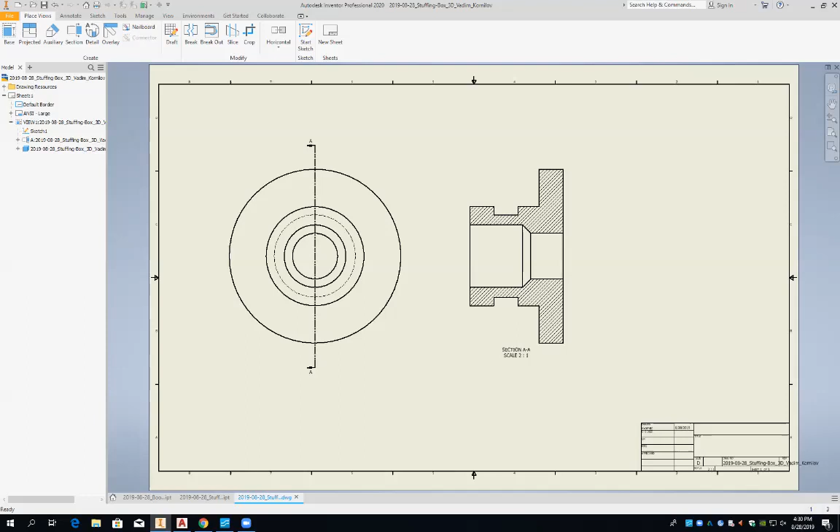Okay? Now what we get to do is this. You have circular right there. Click on circular, click your hole that you just got finished doing. Rotation axis, now I'm gonna pick it from here. There's my axis right there, isn't it? And how many do I want? 4. And then we go back to your part right there, and guess what? You've got it. Okay? That make sense?

Now, I went over that last little part pretty fast, but I wanted to get finished today before this other class starts. So if you guys want to come in early, before class at all, feel free to come in, okay? And I can help you out with class before you can actually get going with some work and do that.

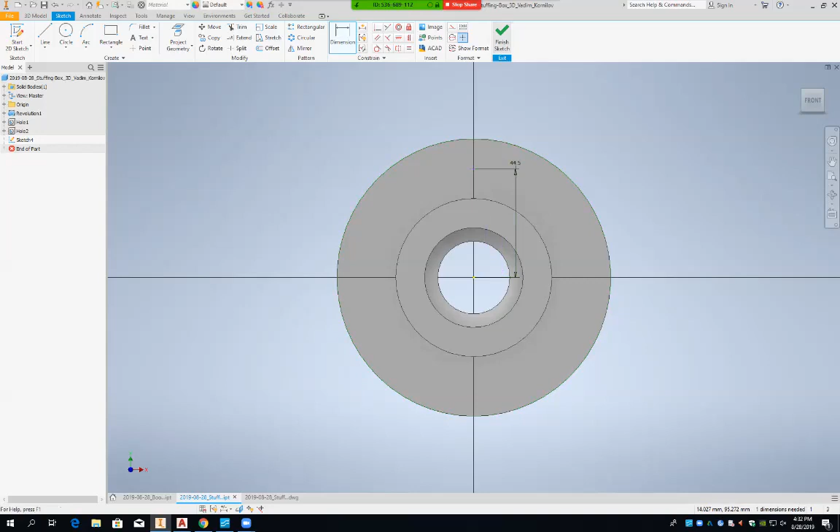But try over the weekend, where you have a long weekend, just play with it. I showed you a couple of different ways of doing the same thing with that project geometry, so don't be afraid to use it. If you want to reference something that's embedded in it somewhere, just bring it up and use it, hook onto it. Or use it to trim it off, too, if you want something exactly lined up.

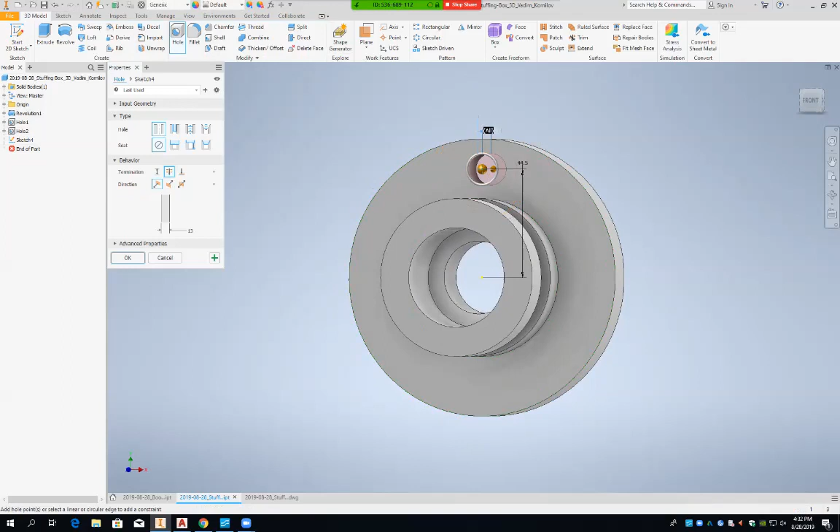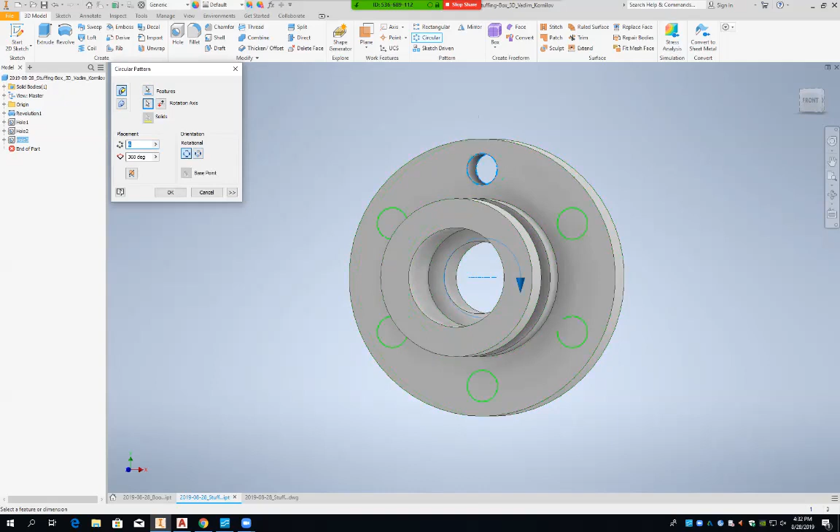Okay, so what we're going to do, we want to go ahead and maybe do it like the rack. That hole right there, right? So, if your rotation now, you want to find the one that's right there, isn't it? How many? I think 6. Maybe so. Okay, yeah. So hopefully that helps you out a little bit.